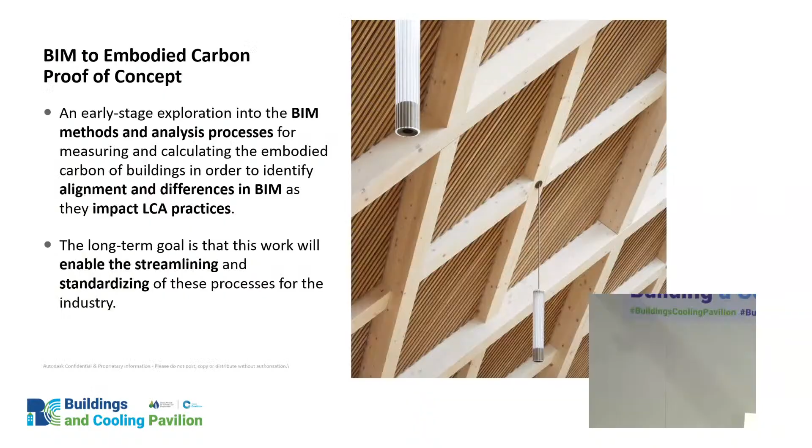It was a 6-month project schedule. All 6 firms worked on the same Revit model, which I'll share more about shortly, and having one model to measure embodied carbon freed up the cohort in many ways, not to mention IP issues, but as an artificial building, because it was just a render of a building that Autodesk had created, it created some limitations.

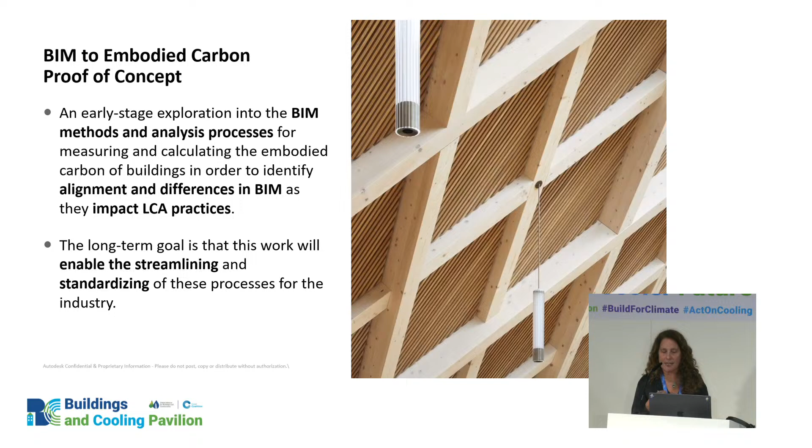I also wanted to take a step back. I think at a conference like this, there's a lot of very high-level thought leadership concepts. And the reason why I wanted to put the whole team here is this was very technical work. We really needed the practitioners who are doing the embodied carbon assessment to understand the process and what we were getting to, and they also needed executive support within their companies, right?

Because architecture and engineering firms get paid by the job. So this was volunteer time of these companies to improve the industry, and that is not to be underappreciated. That was a tremendous contribution of time and effort toward the industry. And this level of expertise is exactly what we needed to collect, to synthesize, to extract the data that we needed to formulate best practices, and to trust that we would help establish these best practices for the industry. So once again, really acknowledge the work and the commitment that came into a project of this type.

So what was in it for them, right? So how did they convince their executive teams that it was okay to volunteer this time and work like this? So currently every firm is creating its own methodology for creating BIM data. And this proof of concept, the idea was to streamline and standardize this process to save time and duplicative efforts across the industry, to potentially make communication across project players more aligned.

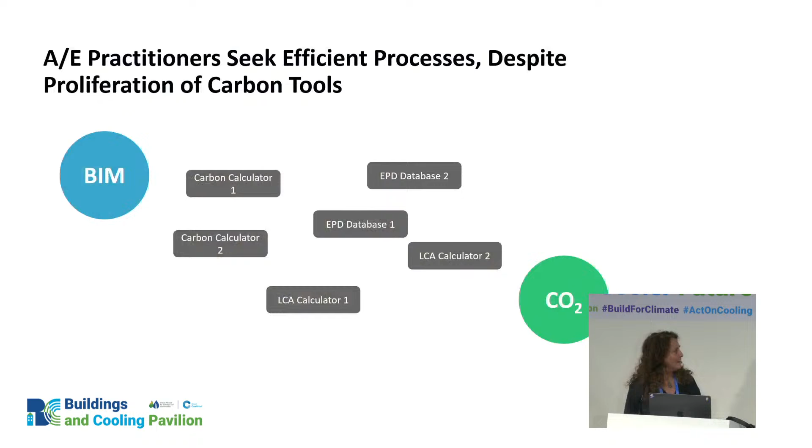Oh, Jesus. This is really challenging my brain to do both.

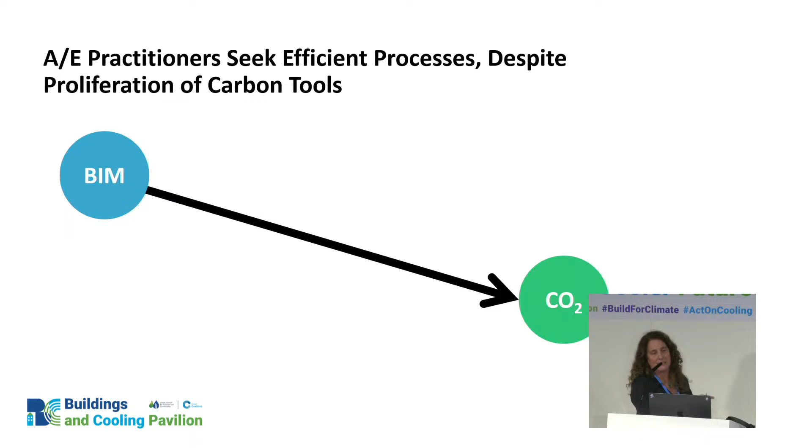I ruined my joke. So there needs to be a direct access to get from BIM to CO2 development. We also needed to use the same project or BIM model. So we landed on Snowdon Towers. Snowdon Towers is a free model that comes with Revit 2024 that's available to anyone. It has no IP. It's accessible to anyone with Revit 2024, which means it can be replicated by anyone regardless of whether they were part of this cohort or not.

And it includes the project scopes we needed. It represents a fairly developed but not overly designed phase of the project, which means it also includes some, but not every single piece of documentation for a project, providing enough to represent a project in which we have a fair amount of data and still lots of room to unpack the question of firm-specific practices.

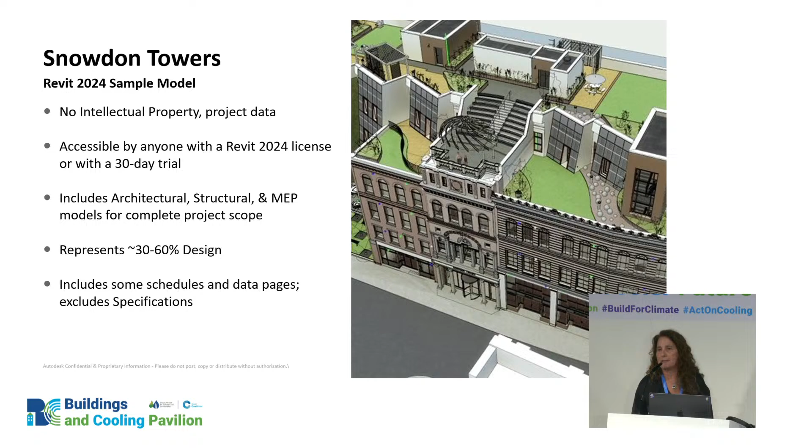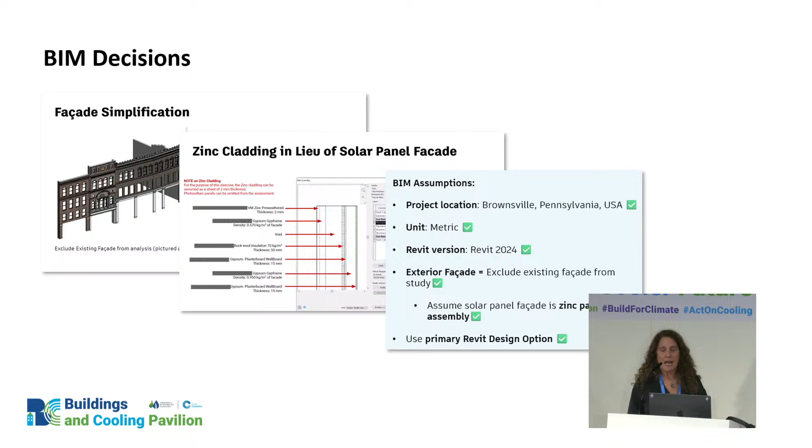Other decisions made were simplifying the model, facade materials, and assumptions. Deciding what spatial elements to include: the Revit model has thousands of tiny bits. What is actually needed to get to the purpose of our study? Our cohort members are all volunteering their time, so we wanted to be mindful and followed the 80-20 rule. I think that actually speaks to what Mel was talking about. We wanted 20% of the materials for 80% of the impact.

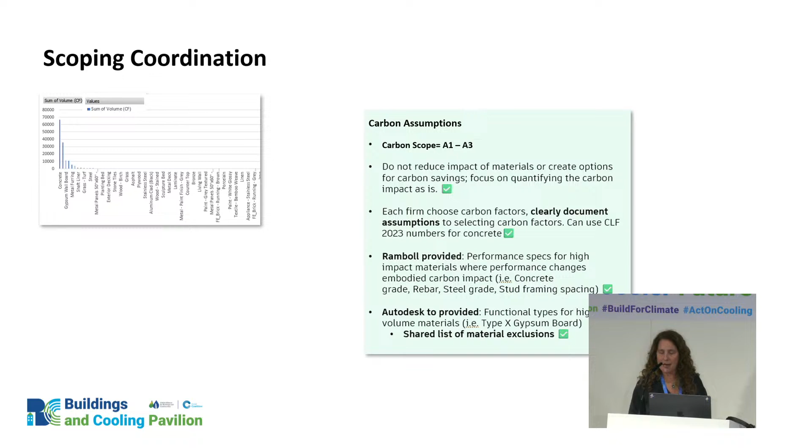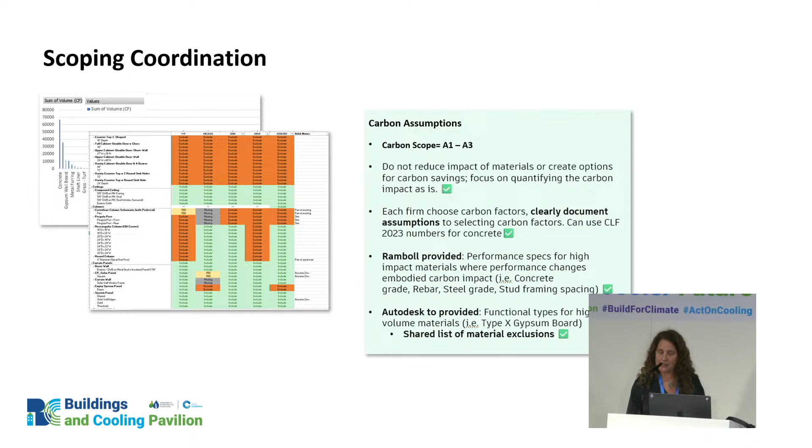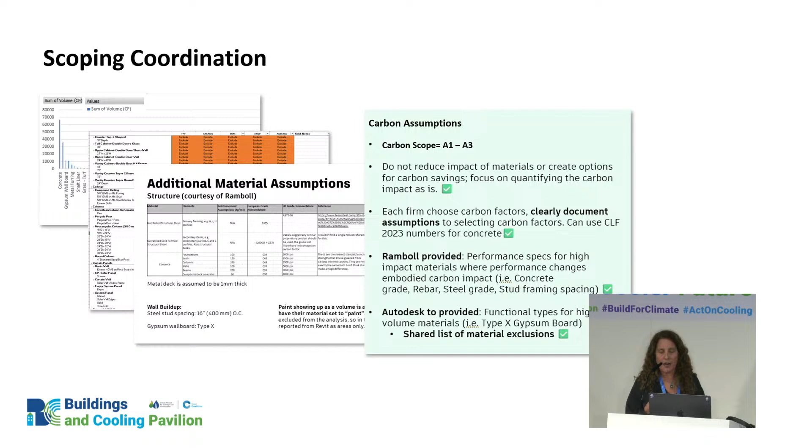This chart shows volume by material in the model. Most of it is from specific elements. It informed alignment around which elements to include or exclude within those material types, and additional assumptions made to capture non-modeled characteristics. Other assumptions: not asking firms to create design options as part of the exercise, to focus on translation of BIM to carbon, and we provided basic assembly assumptions. Deciding what spatial elements to include, the Revit model.

We even questioned how to actually report out the calculation. We have Tim here from RICS. As a cohort, we decided to align reporting with the RICS V2 whole life LCA guidelines. RICS is the Royal Institution of Chartered Surveyors; you just heard from him. This was a critical step to determine how we then needed to structure the carbon data. The output results in a granular reporting of materials and their carbon impact dependent on which project phase you're in. This framework helped us compare quantities and carbon factors used by each firm line by line.

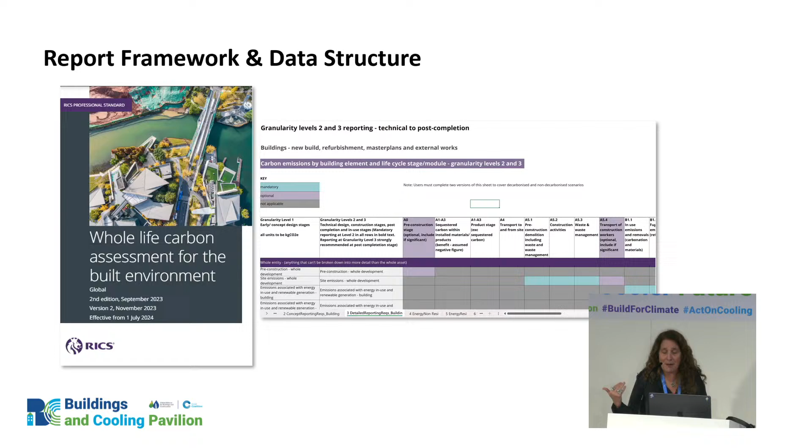Another benefit is the real project reporting template, again implementing something that can be replicated for other projects. We wanted to use a preset template because our focus in this proof of concept was not the structure of the LCA report, but unpacking the BIM practices to get from the model to the output. We didn't need to pick RICS specifically. This proof of concept could be run in other reporting frameworks and find similar outcomes. It could also be done with other BIM models and other BIM software. These are just the decisions we made as a cohort.

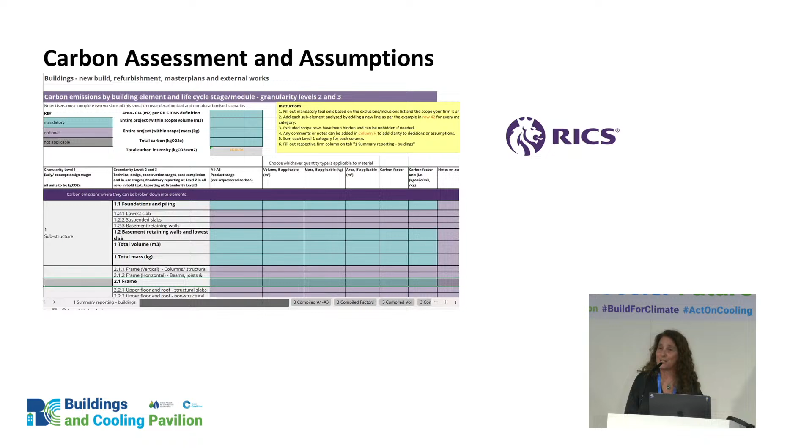So now I'm going to get to introducing the fantastic panel of speakers. I want to introduce all the experts from the group who will be joining us virtually. Of course, we have Nigel here on stage, but we have four practitioners virtually. One is a video because he's actually presenting at the University of Bath this morning, so he couldn't be on this call. I'm going to kick it off with Margarida Gonçalves from Arcadis. Please introduce yourself.

Hi, everyone. Thank you, Rama. I am Margarida Gonçalves. I am based in Lisbon, Portugal, and I work at Arcadis as a global sustainability impact specialist in the life cycle assessment methodology. Thank you. Thank you, Margarida. And now we're going to have Mirko. He's the one who's in Bath, so he pre-recorded a video. Is this going to play? Oh, missed it.

Hi, I'm Mirko Farnetani, the SOM firm-wide embodied carbon leader. Sorry I couldn't join virtually, but I have recorded this intro and I will share details on the themes of non-modeled elements later in the panel. Thank you.

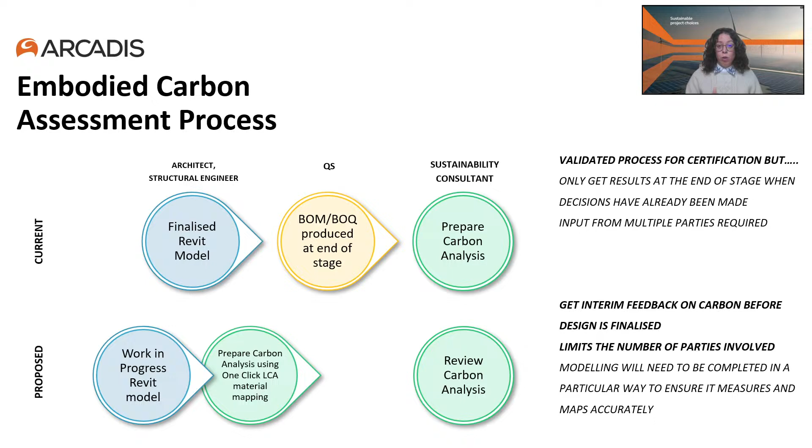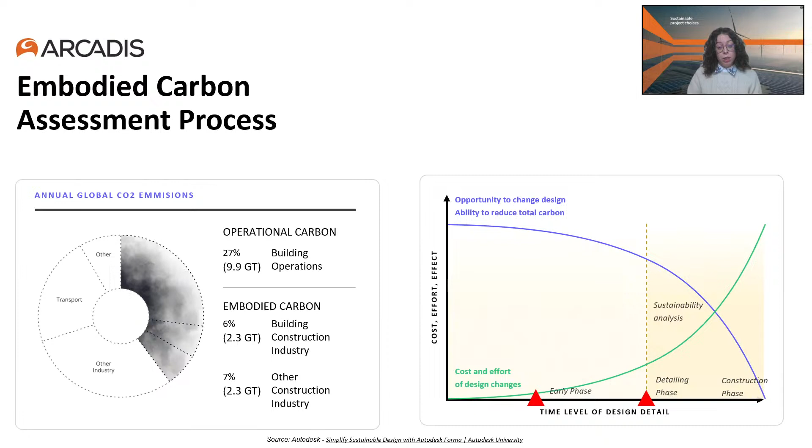As a measured conclusion, linking in this case Revit with One Click LCA improves design choices, fostering sustainability in projects. And just to mention, because it was discussed in the previous panel, One Click has a good database of environmental product declarations, the so-called EPDs. Rama, next slide, please. And this is my last slide. So we already discussed this, and you know that whole life carbon includes the embodied, but also the operational carbon. In fact, nowadays we are giving more importance to the embodied carbon because with the net zero strategies,